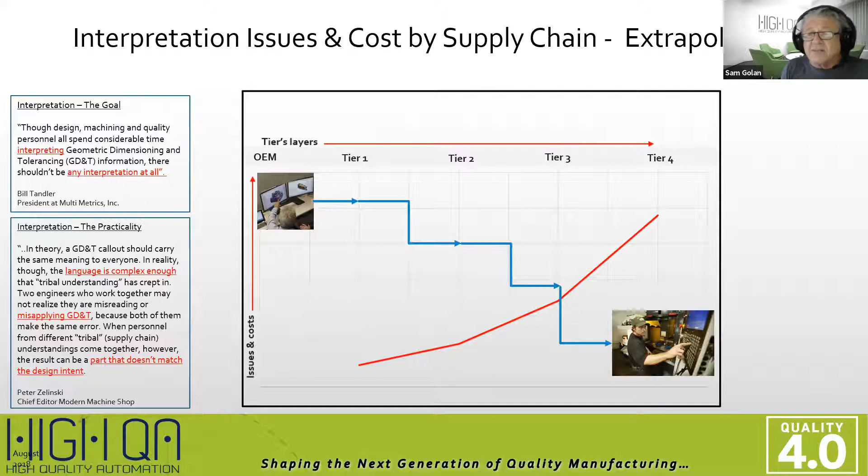So when the OEM finishes designing his part and creating his TDP, the technical data package in some terminology, he outsources this part to the tier 1. Tier 1, of course, having his own issues, and then it's going to be outsourced to tier 2, and tier 2 to tier 3, and then it goes to tier 4. And then look into this process that everybody knows, of course, but then you look into this manufacturing facility that is located somewhere, either across the street or remotely out of the country.

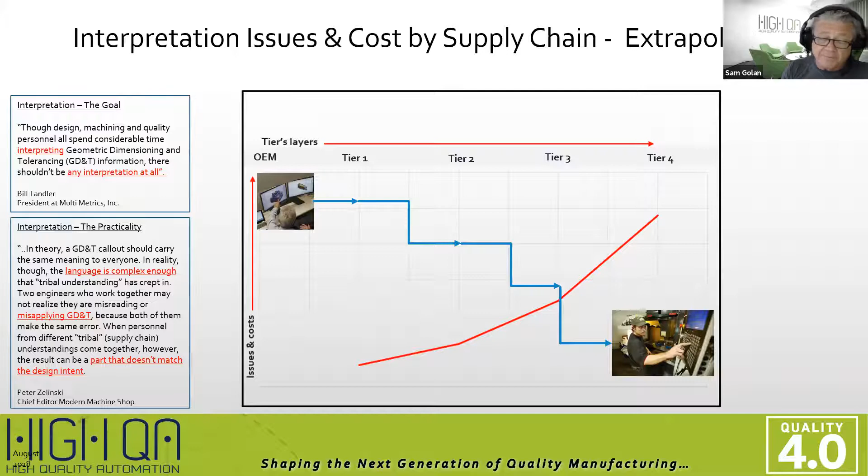And this is not actually getting to the idea of the distance in mileage, how far is the shop. It's also the difference in language, difference in manufacturing culture, in quality culture. And actually, you probably know that OEM in many cases does not even know where the part is actually made or by whom. And if we are looking into the communication, you remember that when we were kids, this is the way we talk to each other. Actually, that's the distance between OEM and tier 3, 4 in manufacturing. It's a Babylon syndrome.

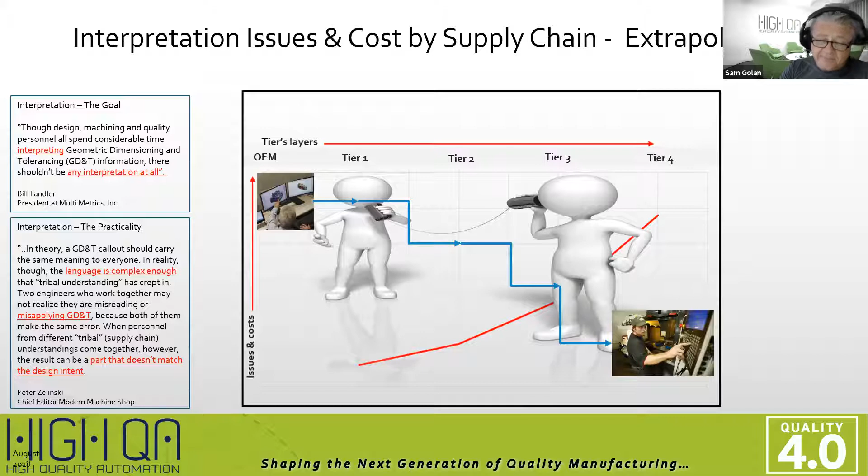Currently, the manufacturing supply chain in any given industry is missing crucial capabilities, but mainly suffers from the supply chain interpretation syndrome. Getting quality requirements either on a 2D print or 3D files or 3D model, kind of immediately stretching the point of, hey, we need to interpret what it is. And if you look what happened in 80+% of the manufacturing industry, people are still bubbling prints by hand or getting 3D models with missing information or limited information or just critical information.

And now they need to interpret what needs to be done because the engineer who made the 3D model does not really know how this part is going to be made, how many operations, what is the quality strategy. This is something that the supplier at the end needs to do. And think about it, then it goes from tier 1, 2, 3, 4, etc. And somebody somewhere, maybe in a basement, needs to guess what needs to be done.

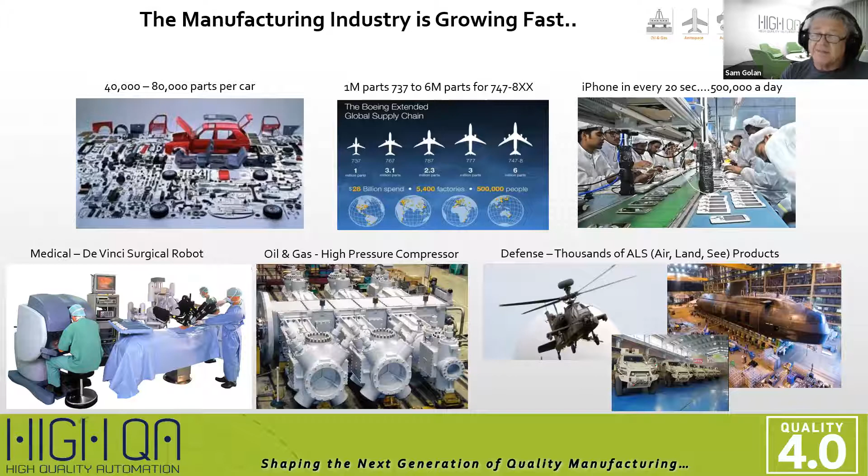So if you look into what happened in our life, manufacturing facilities are always pressed by OEMs or buyers, if you will, in cost reduction, expedited delivery time, providing tight tolerance products, a variety of products on time and on budget. And if we summarize, I mentioned at the beginning that ERP is a need, but not a solution for supply chain.

POs, perfect. Warehouse managing, perfect. But supply chain data, I'm not sure that it's really providing the solution. Manufacturing supply chain has many, many moving parts and tons of challenges every day. So only scalable, interoperable supply chain planning will optimize the process from A to Z, eliminating the need for interpretation, and actually streamline the process between suppliers, buyers, and all in between.

So I would like just quickly to summarize and talk to you for 1 minute about High QA. High QA is a quality management system that enables companies of any size, small to enterprise, to automate their internal manufacturing quality processes, also with supply chain management. The company has hundreds of customers already of all sizes, from OEMs all the way to the smallest tier in the aerospace industry, medical, oil and gas, defense, automotive, and all other manufacturing verticals.

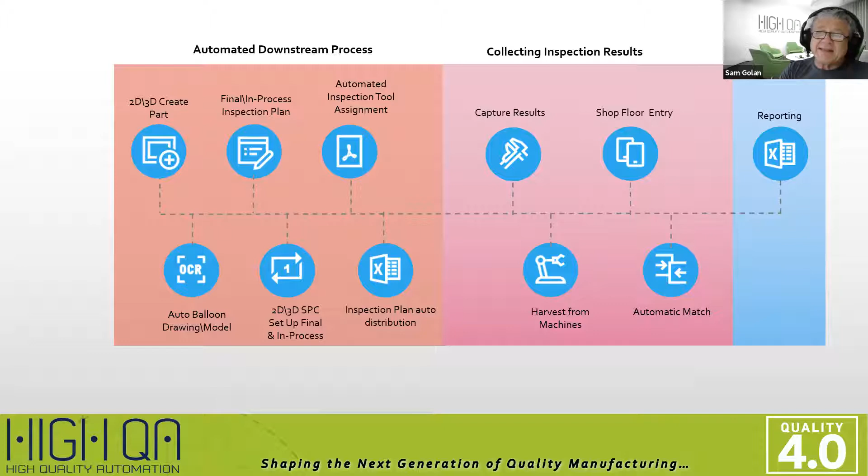The key success factor of High QA is that this is an all-in-one product. If you look into your current quality processes, you will find out that to do a quality project from A to Z, you're probably using 3, 4, 5, 7 packages or solutions, a lot of Excel. And then you can start your project from A to Z, from 2D, 3D file, all the way to reporting. And all of this can sit on our High QA 360, which is the supply chain. Then there is a completely seamless integration between OEM buyers all the way to the suppliers.

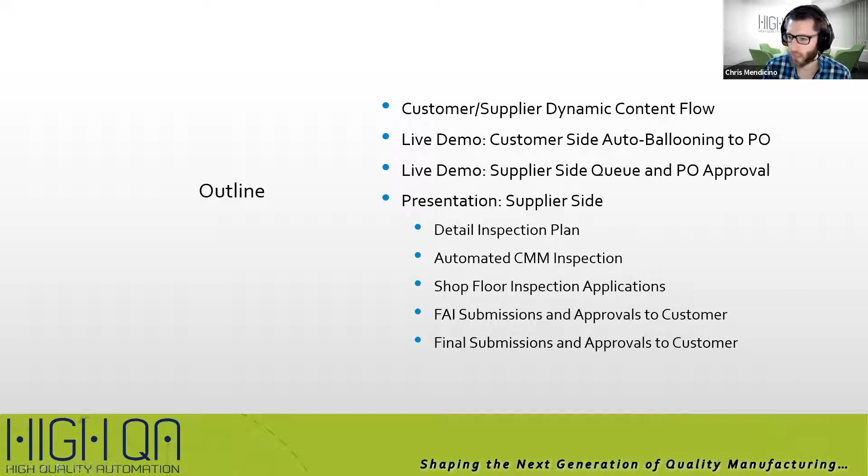Then we'll do a live demo of what the customer side experience looks like. And then we'll talk about the supplier side experience through a combination of some demoing, but there's a lot of activity that would happen on the supplier side. And so for the sake of time, we're going to explain some of those concepts through a couple of quick slides. Okay, so let's get into that. The concept here is High QA is providing a single platform to exchange data between a customer or a buyer and a supplier.

So a customer, somebody like Global Engineering here, might be a manufacturer of their own parts, and they may procure their own parts, or maybe they're just a purchaser and they do some assembly, something of that nature. And then we'll have the supplier over here, who is a contract manufacturer that supplies parts to Global Engineering. And so if we look at the process today, what typically would happen with the manufacturing side for Global Engineering, they would have these various phases that they walk through.

So there's product and design data that is put together. So you're starting with a drawing, you're building some core manufacturing quality requirements, and then we're expanding those quality requirements to account for the various steps in the manufacturing process, like breaking things out by operations, building detailed sampling plans, and so on. And then we'll talk about internal production that would go on, and all of the data collection tools that our customers would use to collect inspection data and traceability data for all of their samples across the shop floor environment in their own facility.

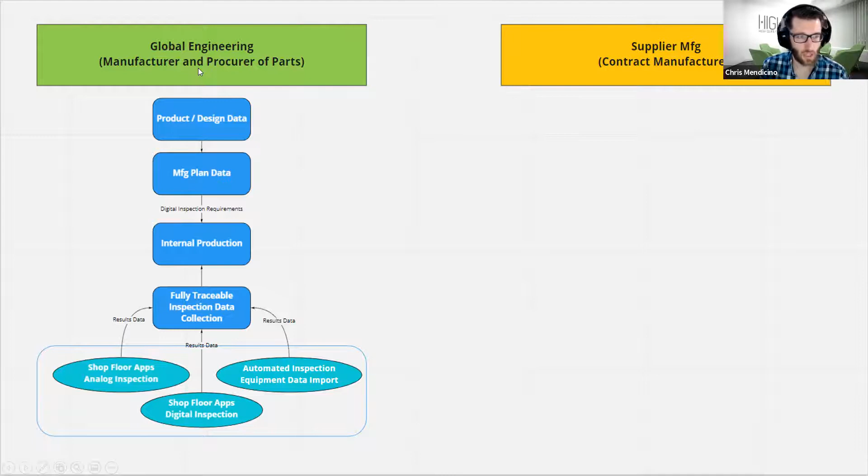Okay, and so what we're doing now, this extension, is taking the experience that we've provided for manufacturers in their internal facilities and extending that experience down to suppliers in a seamless fashion to make suppliers a seamless extension of a buyer's manufacturing shop floor. And so that process happens through what we call a TDP submission, a technical data package.

So if you're outsourcing parts to a supplier, then you would still have your drawing, your design data that is submitted down to your supplier. So the supplier is able to view that data through a seamless interface with all of the quality and technical requirements of that part in the drawing.

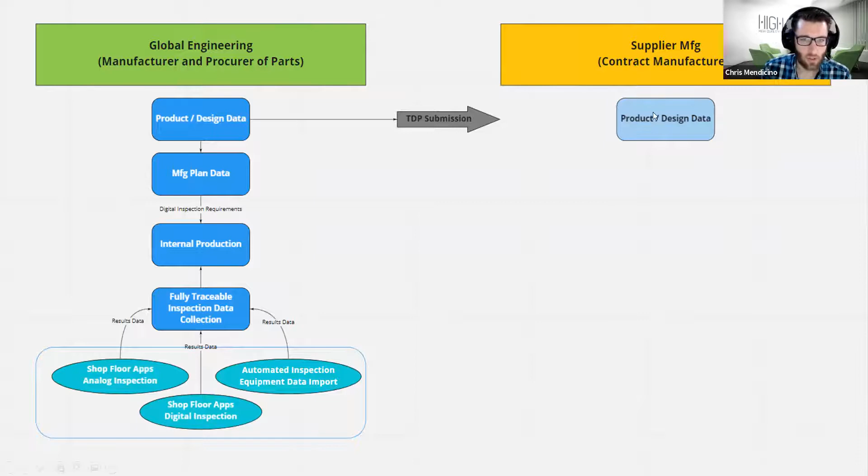So it's not just sending a drawing via email and saying, here's a PO, here's a drawing. You might have an external contract or something of that nature, but you can embed all of the requirements for quality inspection with the drawing all together and send that down to the supplier through one system. And then the supplier, as we'll see in the presentation here, has all the same tools to manage their quality inspection that the buyer has. And they're working in the same platform, the same ecosystem.

So when Sam talks about mitigating misinterpretation, there is no way to misinterpret the data requirements when you're working on the same ecosystem. And so then once the supplier does all of his quality data collection, all of the inspections, so first articles, production data, per AQL requirements, all of that stuff, it's then able to be submitted back to the buyer seamlessly through one single exchange interface.

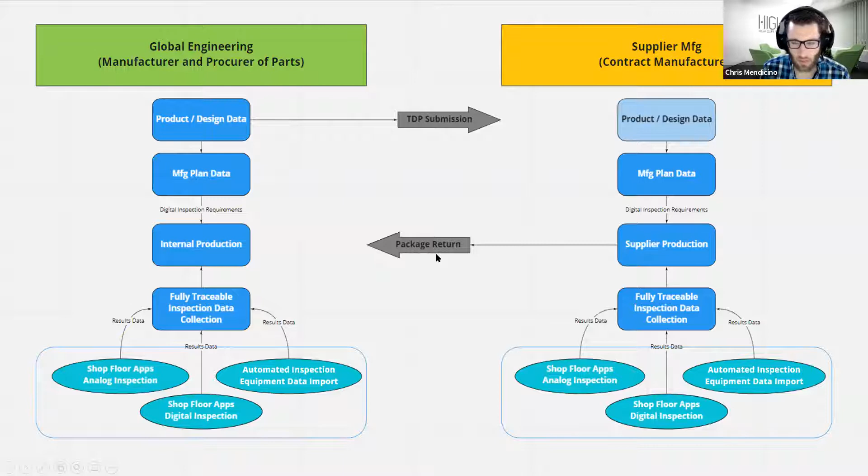So let's jump over to a live demo, just see what this practically looks like. We're going to start here with the buyer experience. You can see the buyer up here. This is me, Chris Mendicino. I'm going to play the buyer, and then we'll switch to another instance. I have a whole separate machine that is running a totally separate Inspection Manager instance, but they are connected through our supply chain portal. You'll see that the supplier experience is a slightly different color for the UI, so that way it'll help us distinguish where we are in the system.

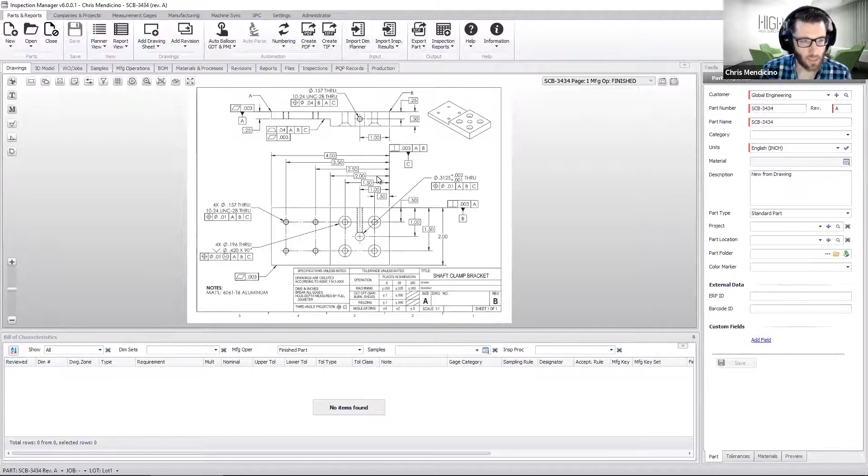So from the buyer experience, we would start with a brand new drawing. So I'm going to bring that into the system, just like so. Now for those of you familiar with HiQA, these are standard tools that our customers have been using for years now. And so I just wanted to show this from the beginning as a walkthrough for those of you who have not necessarily seen Inspection Manager before. Something important here, I'll talk about that in just a second.

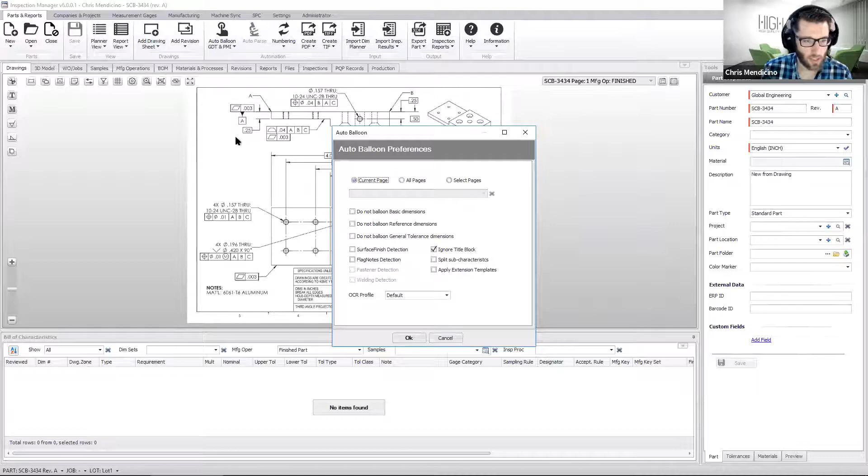So we're starting with a drawing, and we have the ability to manage the part numbers and rev and kind of the definition of this, who the customer is, and so on. But we're going to take this drawing and we're just going to auto balloon it like so. This is just a standard PDF, and we have a lot of options here, but for the sake of time, we're just going to run this the way that it is.

Now, something important to note here, the HiQA 360 platform will account for a couple different scenarios. It'll account for if the buyer wants to do the ballooning and define all of the technical details up front and send it down to the supplier. That's the ideal case, and that's what we're going to be showing today. But we also understand that there are some organizations that would prefer to just send a drawing down to the supplier and allow the supplier to do their own ballooning and build out the technical requirements based on whatever details were shared within the PO.

So the system can work either way, but the reason why we're showing it this way here is because we feel that this is an improvement beyond what companies have traditionally been doing, because it's fine to just pass a drawing down to one supplier who's going to build that part.

But what happens when you have multiple suppliers that are making the same part for you, and they're all doing their own ballooning, they have their own reporting and such that they generate, and there's no way to do clean comparisons of that data between the suppliers and evaluate them easily.

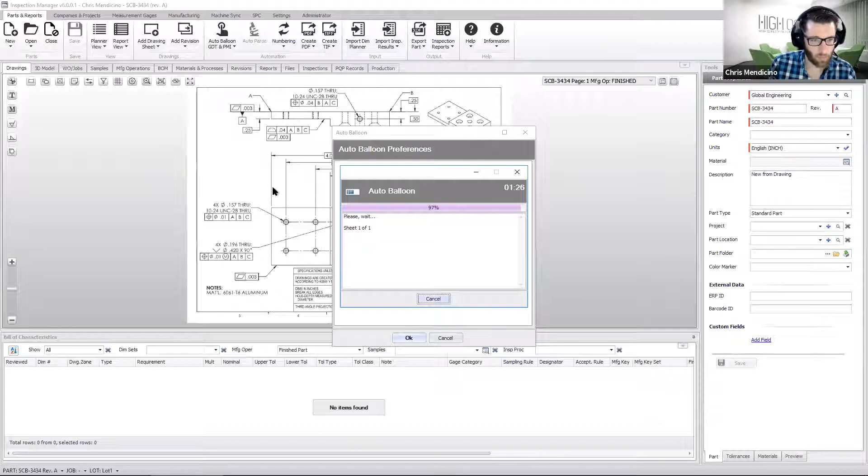And so by using one system to manage all of your suppliers and defining the quality requirements and the technical details up front on the buyer side, you're able to then pass down a single set of information that is uniform across the different suppliers. Okay, so that's a new experience for some, but it's something that we want to demonstrate here this way. So you can see what happened here.

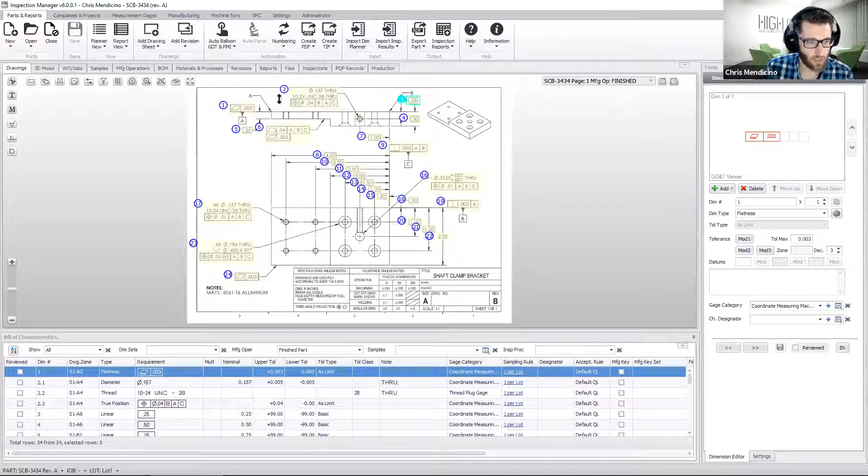Our very advanced OCR engine is able to analyze drawings and very rapidly collect all of the information from the drawing. So you can see what happened down here in what we call the bill of characteristics. Okay, so we grabbed the type, so flatness, diameter, thread, true position, the requirements, the nominal, upper and lower.

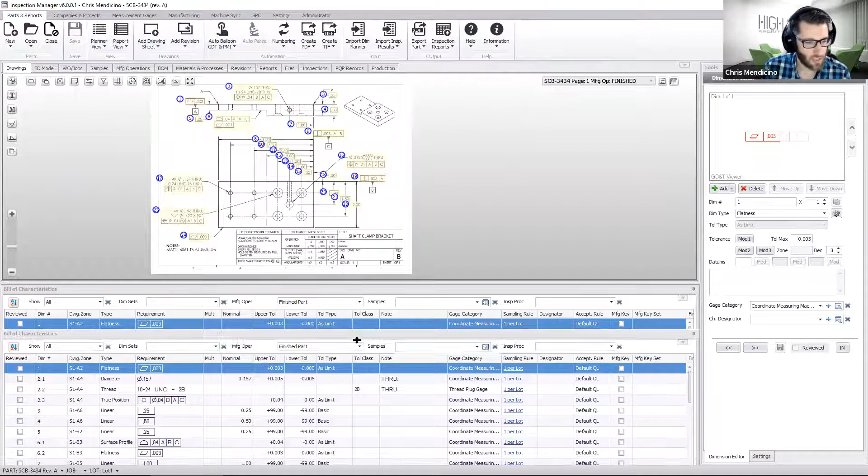And so this type of automation is actually one of the key differentiators that we have in why we're able to make this proposition here to say buyers can define all of the quality requirements up front, because it's so much faster to do than you were doing it by hand before.

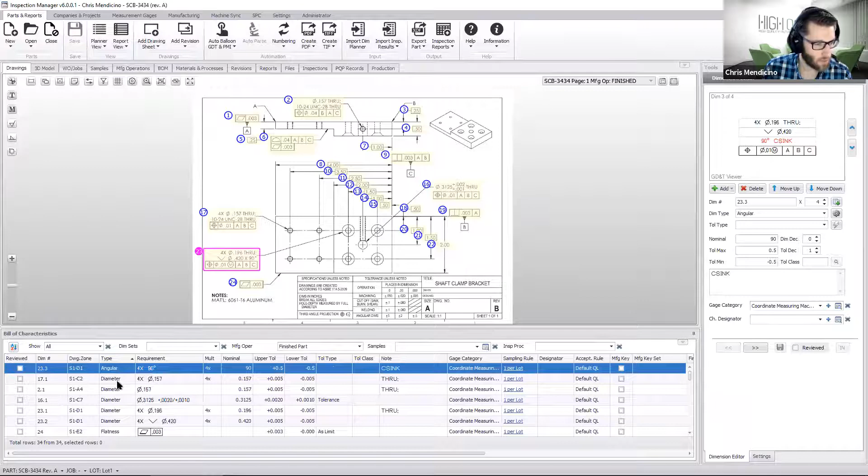Okay, we can apply gauge categories automatically based on dimension types. That's what I have set up here, that most things are checked by a CMM, but some things like threads are checked by a thread plug gauge, for example. We can define critical features. So let's say I wanted all diameters to be critical, something like this. I can just do a bulk update and grab all, assign critical to all diameters, just as an example.

But the point is the buyer can define the important characteristics that need to be checked at different sampling rules and so on. We're not going to get too deep into that today, but just kind of highlighting some of the tools that are available here. Okay.

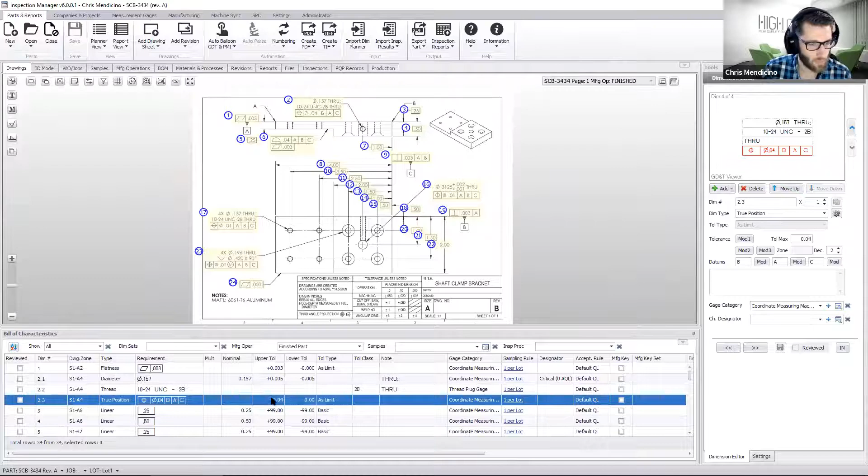One last thing, we're going to show the material down here. So we have material called out on the print. Okay, so I'm going to capture that material as well, because I need to specify the material requirements to my supplier. Okay, so when I select that, I can populate this as needed.

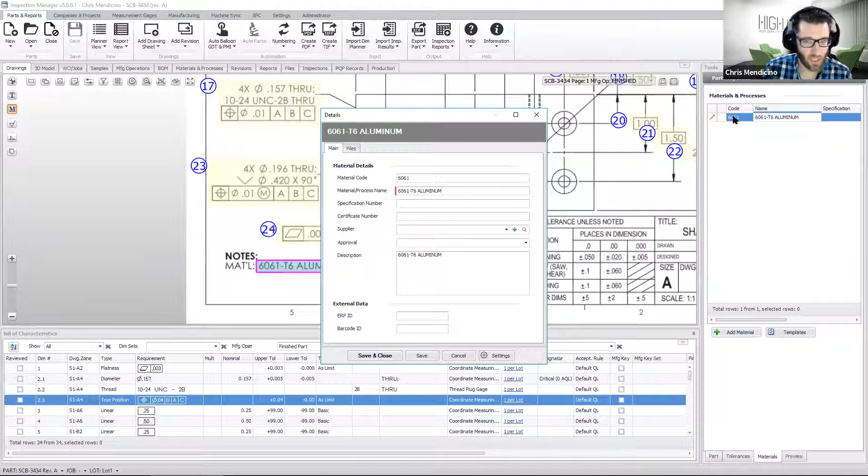Right now, this entire experience ends up going down to my supplier so that my supplier can then provide things like a cert number, who they purchased the material from, they can upload their material certs and so on. And then when they return the information to me, all that information gets populated on the buyer side. Okay. So everybody's used to using the same tools and is able to share data quite seamlessly.

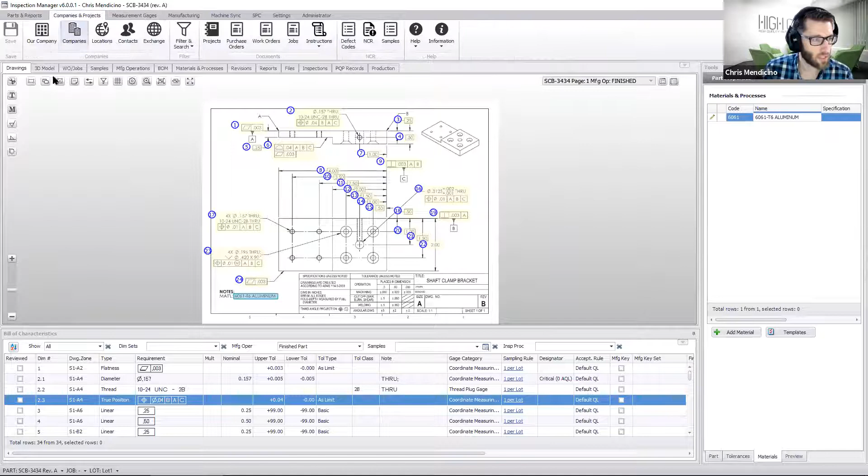Now, there is a layer in here that deals with internal order numbers so that you can track things that way. We're not going to get to that depth just now. What I'd want to do is, for the sake of time, kind of move through to where we need to be. So from that point, we're going to jump over to purchase orders.

Okay, so the purchase order is the natural vehicle to transmit the data back and forth between buyer and supplier. In most cases, it is the single record that is consistent between the buyer and the supplier. Each buyer and supplier, they'll have their own job numbers, their own lot numbers and such for their internal management, but the PO is kind of the linking item between those. So that's why we started with POs here.

And this can be seamlessly integrated with ERP systems so that you're not redundantly entering data. You create a PO in your ERP, it'll show up here in this system so that everything's a seamless exchange. Okay, so here we're going to create a PO though. Let's say you don't have an ERP or you're not connected to an ERP. We're going to say new PO.

We're just going to make a number here. We'll copy the part number that we have. And we're going to pick the supplier. This is the supplier that's set up on the other instance. We'll have a due date. Again, this could be filled out by your ERP automatically.

And we'll have a workflow associated with that. And we'll have personnel who are responsible for approving and reviewing and submitting the PO down to the supplier. So there's responsible parties inside of the organization. And we'll attach a particular part record here.

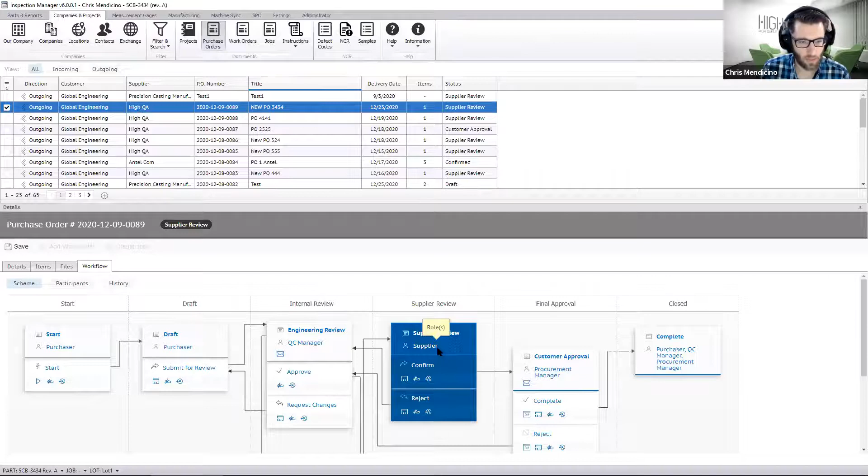And right now, we're going to bounce real quickly over to Hans for a quick intermission, kind of a summary of where we are, and Hans is gonna highlight where we're going next with these tool sets. So Hans, back to you.

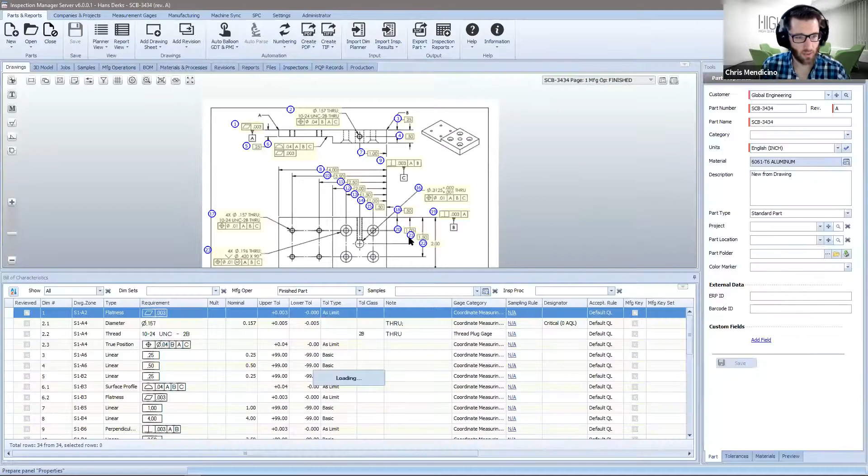Now, this is where it goes beyond just an ERP exchanging what Sam was referring to as metadata. This is where the PO typically stops within an ERP system. But here, because we're dealing with the core data of all the technical requirements, I can open up that part and actually review it in my system, because the entire part record was shared through the High QA 360 experience. So I'm able to see everything that my buyer or customer set up for me.

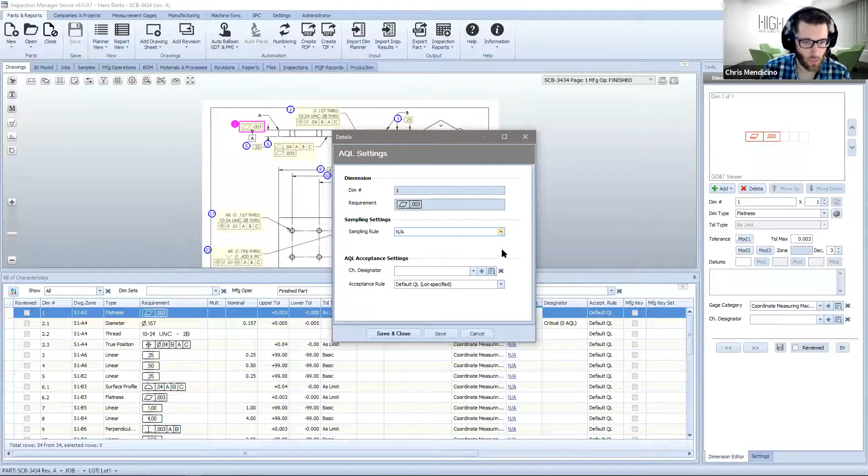I can review the exact same balloon drawing, and see the exact same bill of characteristics, which features they annotated as critical. If there were sampling rules set up, those sampling requirements would also show here. We can get fairly detailed with our sampling logic, whether it's based on an AQL table, percentage of the lot size, 1 per X quantity, or X per lot. Different rules can be applied for different sampling requirements per each feature.

So as the supplier, I say, okay, all of this looks good. By the way, I'm able to see my materials and such that are required here as well. So I can go back to my purchase order and say, great, that's a good purchase order, I'm going to accept it. And now it shows up on the customer side as an approved PO that we're going to start working on.

Okay, so the next step is, again, going beyond just a standard exchange platform.

The buyer and supplier now have all the tools necessary to really carry out their inspection in detail. There's a lot of manufacturing details I would want to specify here. I may want to break this up into specific operations in which to inspect the part.

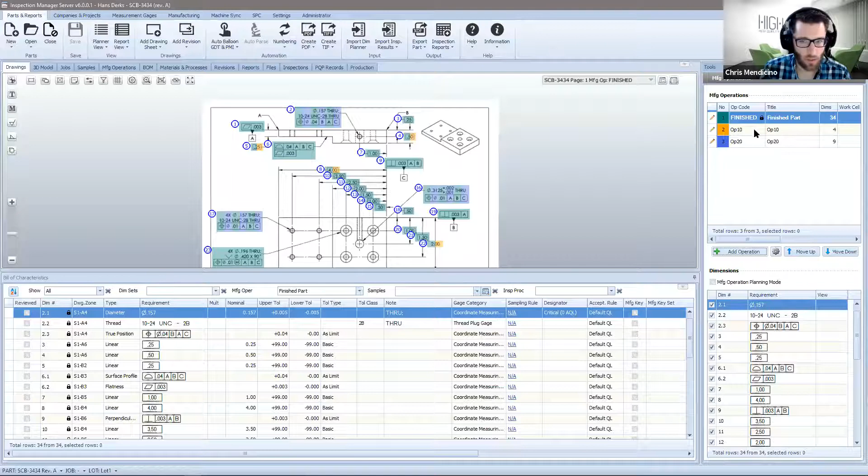So I can click a few features here and say my first operation, I'm going to check these features. On another operation, maybe I'll check these features here. And I can break up this final inspection plan, or finished drawing, into multiple operations. So I can define these here. Maybe this is my rough stock prep operation.

I can define it as a specific process and so on. I don't have processes defined, so we'll skip that part. But speaking to the tools the suppliers have available to them, when I create those operations, I'm creating a unique ballooned print for that operation, a unique set of inspection requirements completely isolated from the rest of the operations.

That means I'm able to specify precise gauge categories for that operation, because in-process inspection might use manual gauging equipment, and final inspection might use a CMM to inspect and QC. So I can specify the differences for each operation.

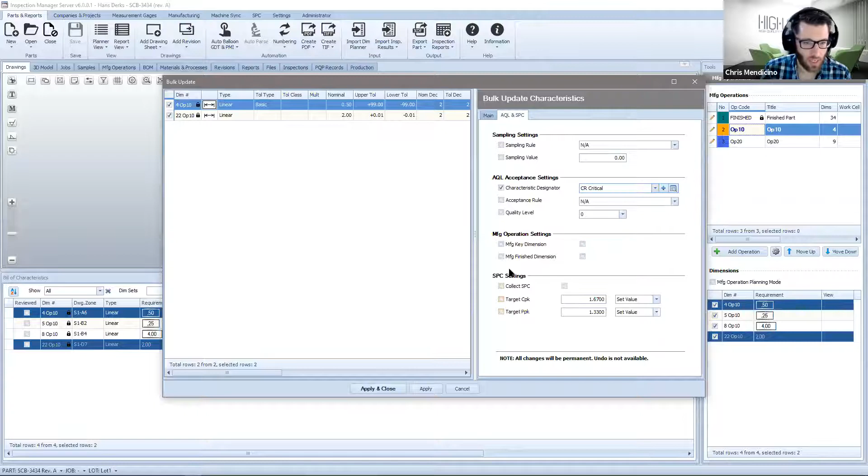I can specify manufacturing critical features. Maybe my customer didn't care about these, but I might as a user. So I might have certain items that I mark as critical, and they can be unique designators as well. But for the sake of time, we're just going to mark them as critical here. So we may have all of those tools.

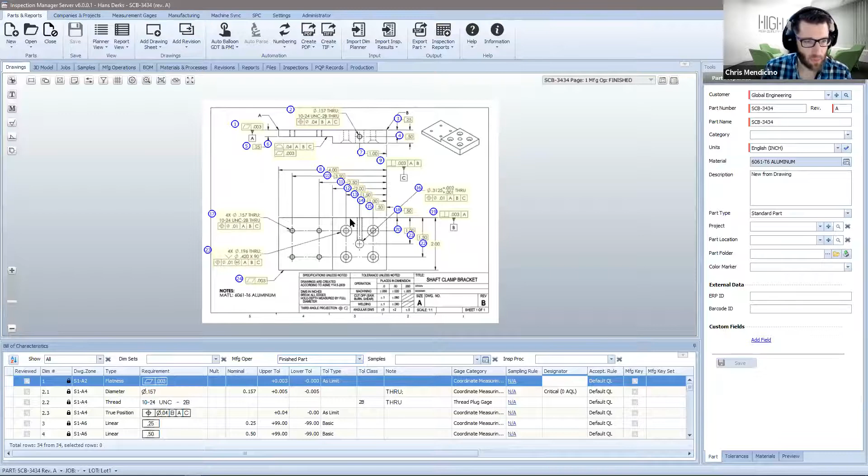Now this kind of leads into the data collection side of things. Once I've fully prepped this part, I'm able to then receive results data into the system. So I have a file that I prepped as a CMM results file. We'll pretend that these are some CMM results that came from a first article inspection.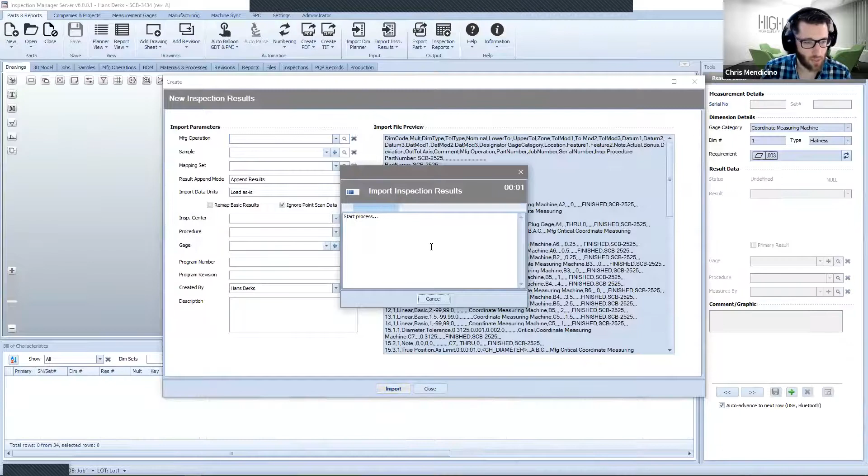I inspected a part on a CMM, and I want to read the results right into my High QA system. And you can see what we have here. We end up color coding all of the results: green if they are passing, red if they are failed, and pink if there's a difference between the CMM program and what you had in High QA.

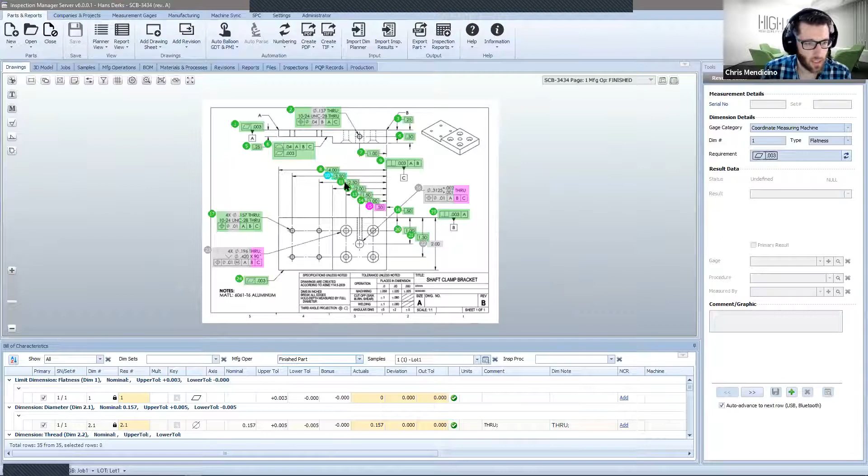We're able to see all of that, and we can interact with it here. We can see if there's some sort of issue going on. I just intentionally threw some of these off just to be able to see those color-coded differences, so that it's not just blindly accepting all of the results.

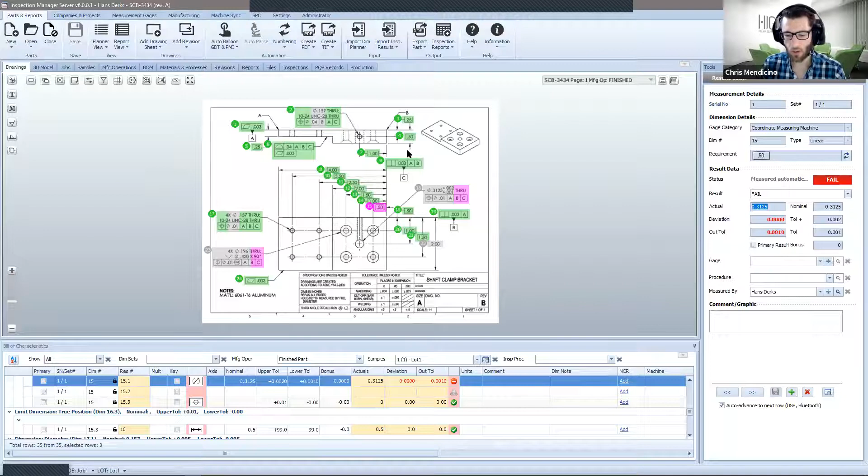We're able to ingest all that data, first for the FAI, but also for all of our production as well. So there's a little bit to get through here. For the sake of time, I'm going to skip forward a little bit. I actually had another part that I had prepped that is a little bit further down the process, so we'll jump over to that one instead of clicking through each detail.

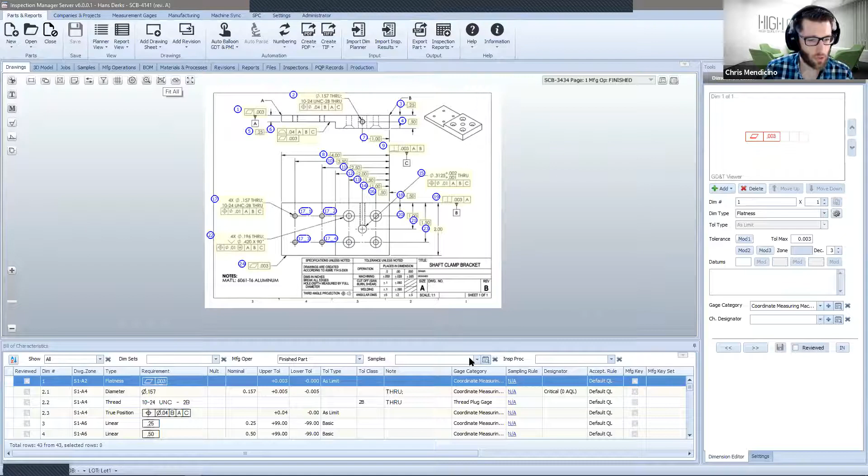Let's say we brought that results data in. What I did, this is all of our document management over here. Here, wrong part, we're going to jump over to the other one. I picked the wrong prepared part here. It is this one here.

There we go. All right, so I did some doc management setup where I actually ran an AS9102 FAI report against that data. And we can see that in here, and I uploaded a materials cert.

Something important to point out here is that buyers and suppliers are not just agreeing on a ballooned print and inspection requirements, they're also agreeing on the types of reports that are going to be produced and supplied by the supplier along with the parts.

In this situation, the buyer said, I need an FAI report for the first piece with the material cert. And then when you're done with production, after I approve all this, then I need a lot inspection report that shows me all of the results data for all of the pieces that you end up inspecting.

Okay, so these reports are then able to be broken down into a package and submitted to the supplier or back to the customer. All right, so I just want to show you a couple of slides that represent that exchange briefly here.

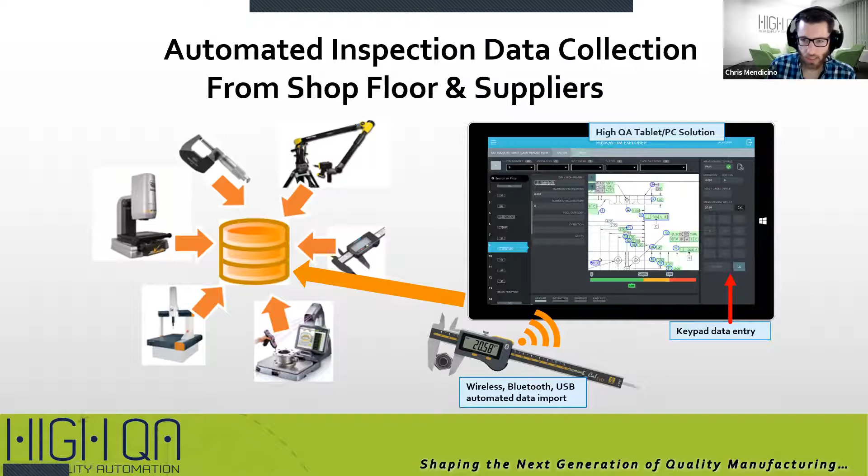We can also automatically collect data from CMM systems, vision systems, even lasers—basically any automated inspection equipment that will output results data. We can attach to Bluetooth or digital handheld gauges as well. Any of these tools we can interface with. There's almost no automated inspection equipment on the planet that we couldn't connect to.

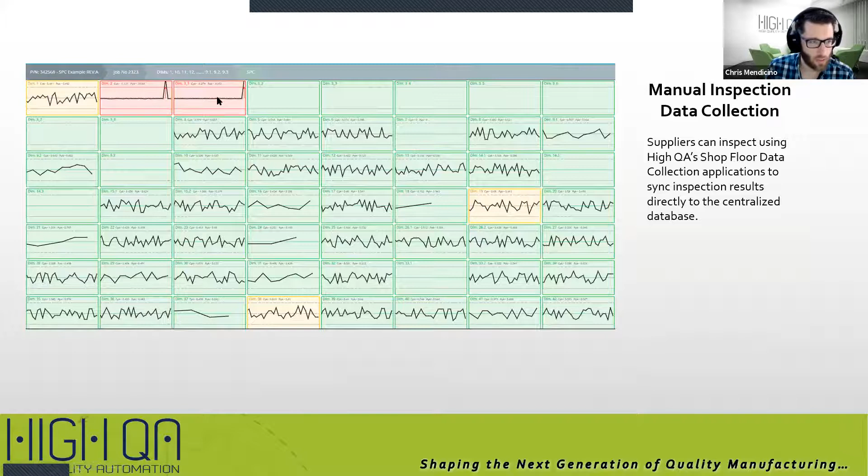That feeds certain data collection interfaces on the shop floor so that shop floor personnel are able to monitor their production processes using SPC charts like this. These are configurable, customizable, but they show a high-level overview of the trends and whether we are in or outside of our SPC requirements. You can see some are highlighted red or yellow here. The users on the shop floor can actually input results against specific dimensions as they're carrying out their production to further things along.

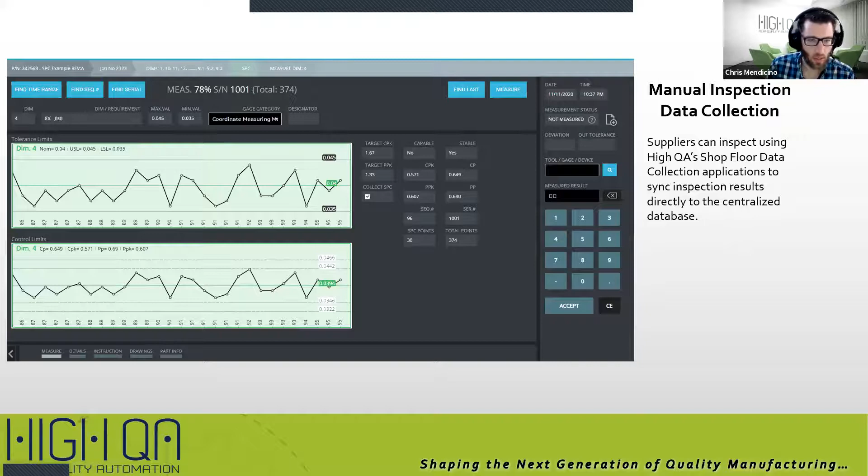Data that's collected from the CMMs is also aggregated against the same data set. So if I'm a user on the shop floor doing manual inspection, the CMM inspections are going to show up in my displays here as well, because it's all one centralized database that's storing and aggregating all of the diverse information.

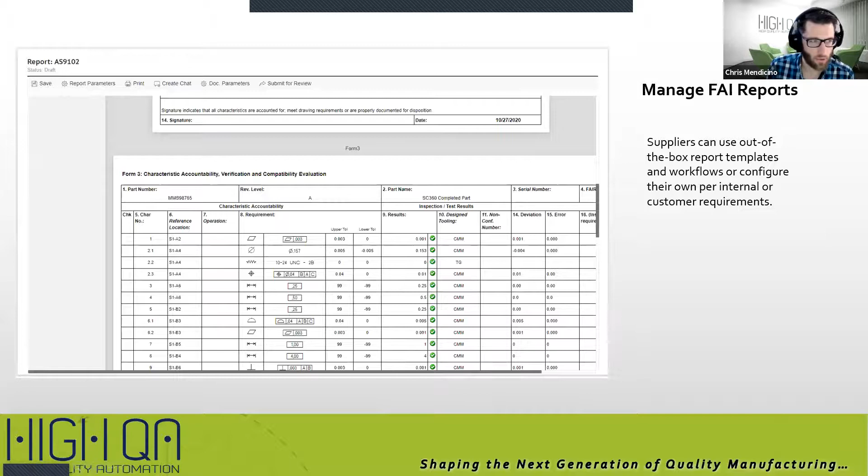This shows the second process, where after my customer approves the FAI, I run my production, collect all my results, and then create a final submission package. That contains, again, the FAI report, the material cert, but now also the lot inspection report with all of the production data. That's submitted to my customer and able to be approved.

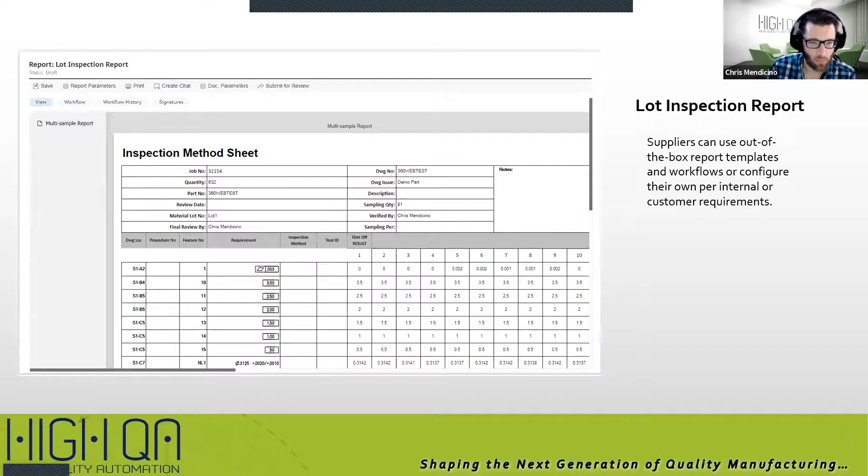We can even send not just the reports, but all of the raw data that came directly from the CMM and was inspected, with a significantly higher degree of traceability—showing who inspected the parts, what gauges were used, certification requirements for all of those gauges. All of that information can be shared through the High QA 360 portal to whatever degree the buyer and the supplier agree upon within their business arrangement.

So that takes us through the whole exchange. Again, this is a simplified workflow. The specific workflows, requirements, even the types of reports—everything in the system is able to be configured and customized per each individual customer and their suppliers. So just because we showed one specific use case, don't think the system's merely restricted to this use case. There's a lot of flexibility and variability that can be applied here.